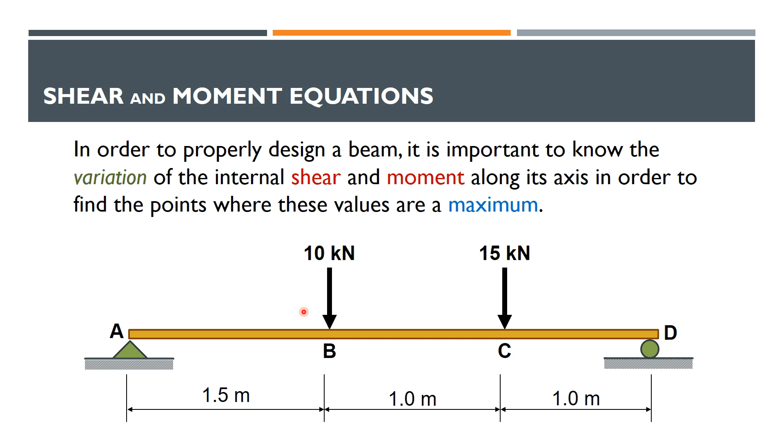And once we have determined all of those values, we will get the maximum values of shear and moment, at iyon ang ginagamit sa design ng isang beam. Although here, we will not design a beam kasi kailangan ma-analyze muna natin mabuti kung ano ba ang maximum values ng shear and moment given the external loads.

So we have here the shear equations. In shear equations, we will sum up the vertical forces to the left or to the right of a section AA. So ano yung section AA na binanggit dito? For example, ito ulit yung beam natin kanina. I just made it a little smaller.

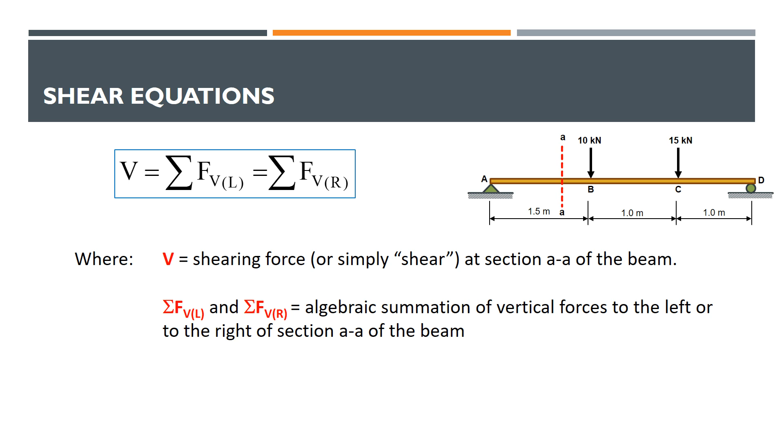So again, this summation of FV to the left or to the right is an algebraic summation of the vertical forces to the left or to the right of this section. Now, pag sinabi nating algebraic sum, we will consider the sign. So here, we will use sign conventions, like positive forces are upward, negative ay downward, etc. I will discuss that later.

For the moment equation, using the same beam kanina, with the same cutting plane here, what we will do is sum up moments to the left or to the right of the cutting plane. So again, ito yung cutting plane natin. This is the left side and this is the right side of the cutting plane.

Yung equal sign dito, the same with the shear equations kanina. Ang ibig sabihin niyan, if you sum up the moments to the left of the cutting plane, equal yan sa moment when you sum up the moments to the right side of the cutting plane.

So again, the summation of M to the left and summation of M to the right is the algebraic sum of the moments of the vertical forces to the left or to the right of section AA with respect to the neutral axis of the section of the beam. So what is the neutral axis of the beam? This is the axis that contains the centroid of the cross-section of the beam.

For example, ito yung cross-section ng beam. Ang very common cross-section ng beam ay rectangular. In a rectangular section, madali natin ma-determine ang centroid nito. Kung ito ang centroid nitong cross-section ng beam, yung axis that passes through the centroid, whether horizontal or vertical axis yan, we call it the neutral axis. Makikita natin yung magiging gamit nitong neutral axis when we compute for the stresses in beams.

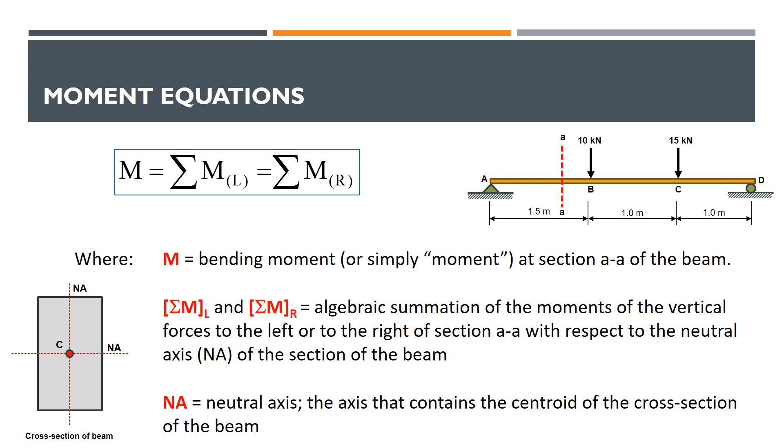Now let us have an example. Let us formulate the shear and moment equations for this simply supported beam. Ito din yung beam natin kanina, and this time, meron na itong reactions. The reason kung bakit binigyan ko kayo ng set of problems na magsosolve kayo ng reactions is because dun sa mga sample problems natin, hindi ko na ipapakita kung paano mag-solve ng reactions. So I will just explain kung bakit ganito ang mga reactions.

So again, we have concentrated loads. If you sum up moments about point D, you will be able to solve for the y component of the reaction at A. And with regards to the x component of the reaction at A, since wala naman tayo ditong external loads na horizontal, wala itong magiging value kasi wala naman itong ibabalance na horizontal forces.

Now, for RD, if we sum up moments about point A, you will be able to solve for RD. Ang naging direction ng reactions natin sa A at sa D ay both upward. So this is what we call the load diagram. This now includes the reactions.

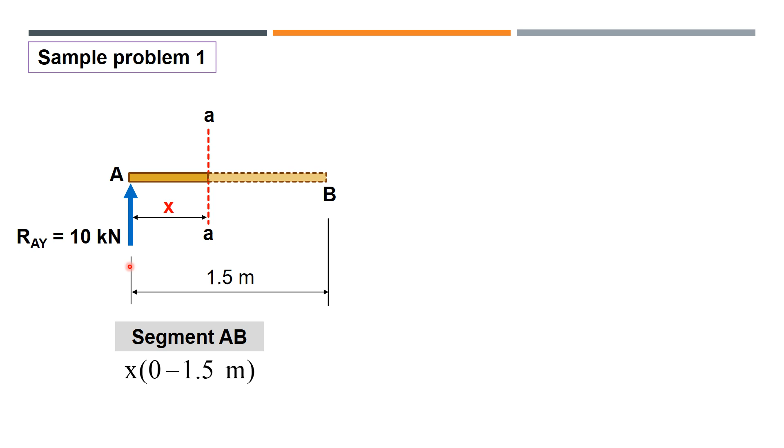Now, ano ang nakasama doon sa left side ng cutting plane? So this is your distance x. So you measure this from the extreme end ng beam sa left side. In this case, that is A. And then you measure that hanggang dito sa imaginary cutting plane. Tingnan mo ngayon, ano ang mga forces na nakasama nitong distance x. So, dahil nag-start tayo sa A, ang nakasama na load ay itong reaction na 10 kilonewtons. So when you formulate the shear equation and you sum up all the vertical forces to the left of your imaginary cutting plane, it will include the reaction which is 10 kilonewtons. So that is RAY.

Or 10 kilonewtons positive. Now here, I forgot to mention na kapag vertical force ay upward, we consider that as positive. So itong nakuha natin na equation na to, this is now the shear equation for segment AB. It doesn't matter kung may nakasamang variable na x yan or wala. Basta importante, you sum up all the vertical forces to the left of the cutting plane. Next, let us have the moment equation.

So for the moment equation, using the left side again of the cutting plane, tingnan mo ngayon, anong mga vertical forces na nasakop nitong distance x ang magkikreate ng moment dito sa section na ito. Meaning, tingnan mo yung mga vertical forces na may perpendicular distance hanggang dito. So in this case, we have RAY, and it has a perpendicular distance of x hanggang dito sa dinaanan ng cutting plane. And it will rotate in clockwise direction. So let us use a sign convention na kapag clockwise ang moment about a point, that is positive.

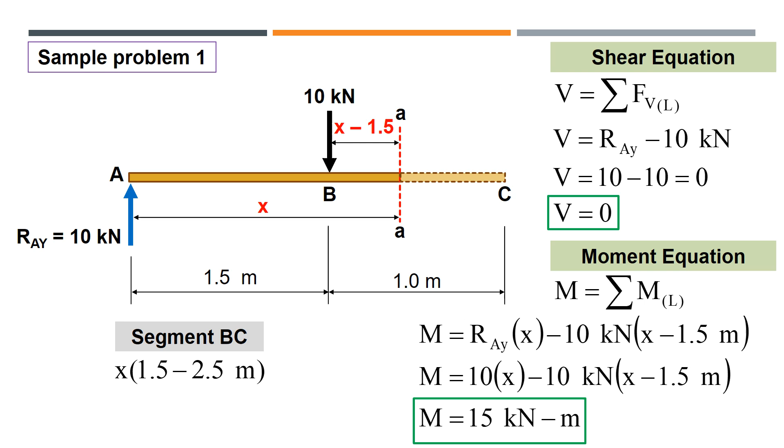Then, for the moment equation, since dito sa distance x again, itong dalawang vertical forces na yan ang nasakop ng x, so yan ang magkikreate ng moment about this point. So, you will just sum up the moments created by the two vertical forces. So, we have RAY with moment arm of x in clockwise direction, so positive. Now, 10 kilonewton force is counterclockwise, so minus 10 with moment arm of x minus 1.5. So, you substitute 10 here and you simplify the moment equation, so that this will be our moment equation for segment BC.

Now, this is again our original beam, and this time we will use segment CD. So pass an imaginary cutting plane through CD, measure the distance from the extreme left, and that is A. So ito na ngayon yung distance x. So you observe the vertical forces na nasakop nitong distance x. So we have 10 kilonewtons or RAY, 10 kilonewtons at B downward, and 15 kilonewtons at C downward also.

Now for segment CD, medyo in-adjust ko lang to na sa taas. So ang limit naman natin dito ay 2.5 to 3.5 meters. So again, for segment AB, we have 0 to 1.5, 1.5 to 2.5, and then 2.5 to 3.5. So we just added 1 meter nandito. So 3.5 meters.

So let us measure the distances from the forces hanggang dito sa imaginary cutting plane, because later on, we will sum up the moments here. So for the 10 kilonewton force, this distance is equivalent to x minus 1.5. And for the 15 kilonewton force, that will be x minus 2.5 meters.

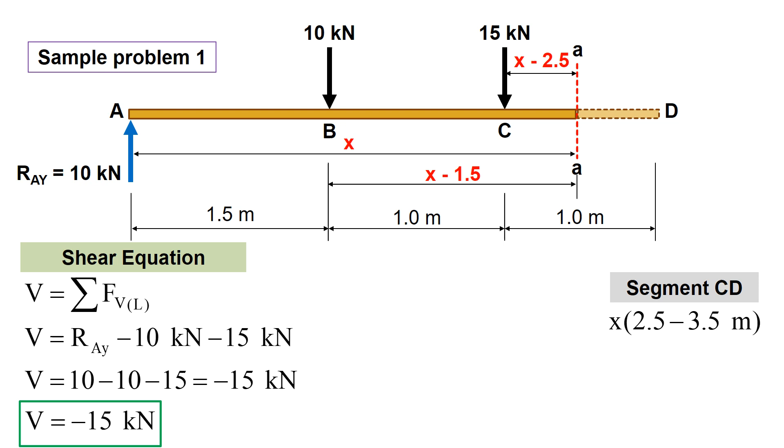Then for the moment equation, so again, itong tatlong vertical forces ay nasakop ng x. So you will sum up the moments created by the three vertical forces hanggang dito using their perpendicular distance.

So we have RAY in clockwise direction with moment arm of X. 10 is counterclockwise with moment arm of X minus 1.5. 15 counterclockwise with moment arm of X minus 2.5. So that's minus. So you substitute RAY, which is 10, and then you simplify the equation. So this is now the moment equation for segment CD.

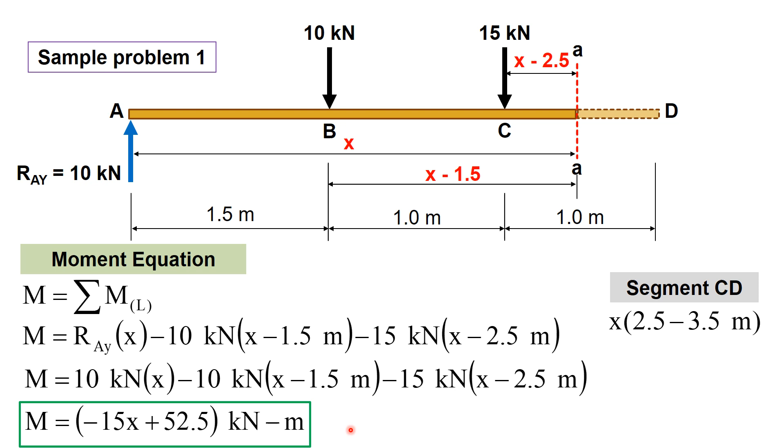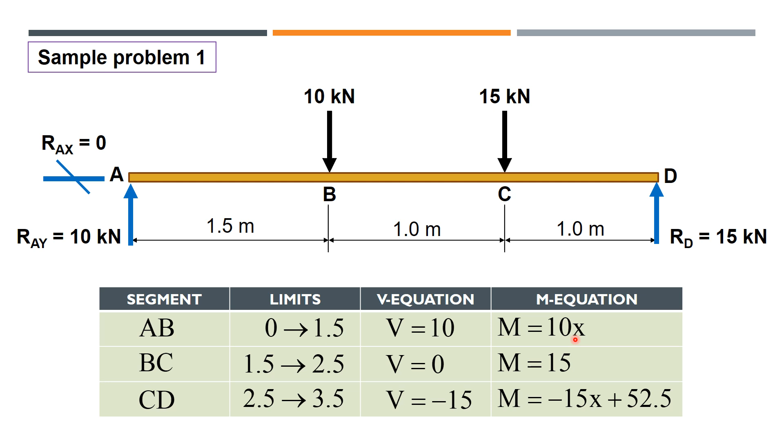For segment CD, limits 2.5 to 3.5 meters, shear equation V equals negative 15, moment equation equals negative 15x plus 52.5. By the way, do not forget the units. The units of each shear value is in kilonewtons. And for the moment, ang unit naman dito ay kilonewton meter. So we will use these shear and moment equations to draw the shear and moment diagrams by substituting different values of x using the limits for each segment.

Now, here we will show how we can formulate the shear and moment equation using the right side of the cutting plane. Kasi yung kaninang equations, lahat yon ay left side yung ginamit natin. So if we will use the right side, here I will start with CD, although you can start with AB also. So I will consider the right side of the cutting plane. There, so distance is x. If you consider the right side, you measure the distance x doon sa extreme point. In this case, this is D.

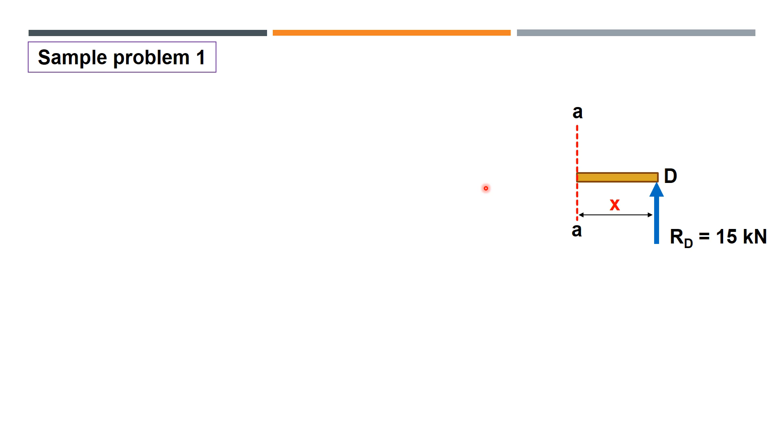So this is now the free body diagram. Hindi ko na lang sinama dito yung kabuuan ng CD. So if you sum up the shear values, titingnan natin ano yung mga vertical forces to the right of the cutting plane. In this case, we have RD, which is upward or positive. So the shear equation for CD or DC is V equals 15 kilonewtons. If you compare this with the shear equation for CD using the left side, ang shear equation ay V equals negative 15 kilonewtons. So parehas din ng makukuha natin but in opposite direction.

So for segment CD, dahil sa right side tayo nagsimula, dito ka magsimula sa D, papunta sa C. So from D to C, that will be from 0 to 1 meter. For moment equation, RD will create moment about this point of the beam with moment arm of X, and this will rotate in counterclockwise direction. So that's negative. So it will be negative RD times X, or negative 15X. This is the same equation using the left side of the cutting plane, but it is positive. So whether you use the left or the right side, we will get the same values, but they have opposite signs.

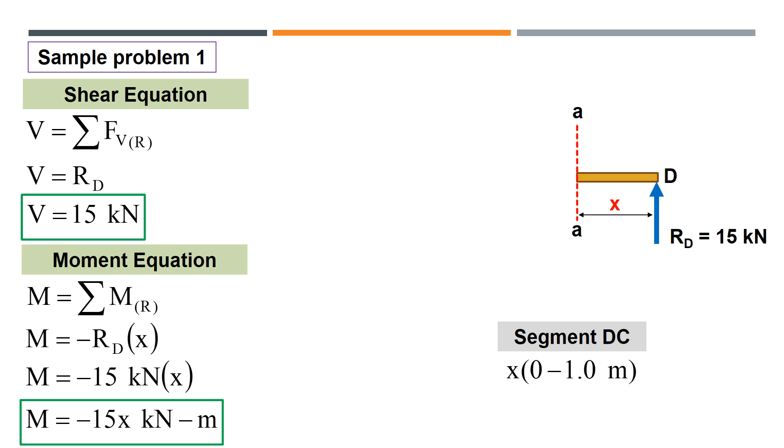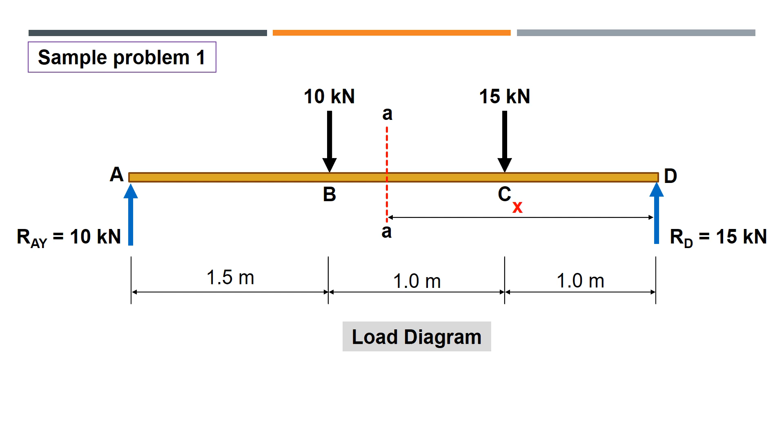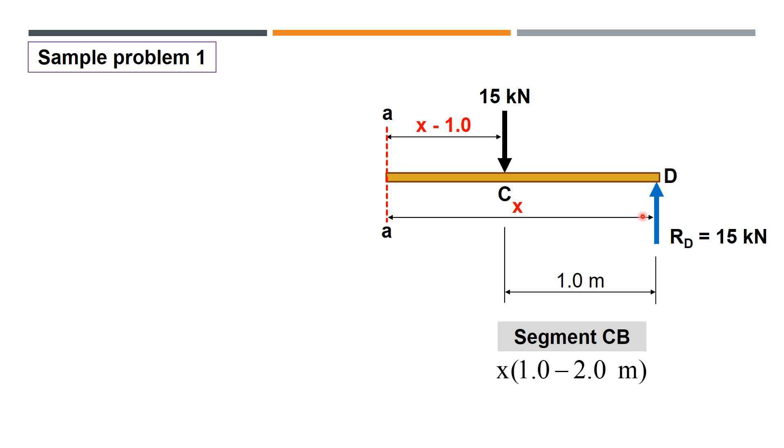Now for segment CB or BC. Again, pass an imaginary cutting plane. Measure that from D. So ang included na vertical forces ay RD and this 15 kilonewton force. By the way, ito naman ang kanyang limits, from 1 to 2. And this is the distance of the 15 kilonewton force from the cutting plane, so this is X minus 1. When you sum up the shear values to the right of the cutting plane, you have RD upward minus 15, or V equals 0. If you still recall our equation for BC using the left side of the cutting plane, we also get the same shear equation, which is V equals 0.

Then for the moment equation, summing up the moment created by these vertical forces about this point. So we have RD in counterclockwise direction with moment arm of x. Then 15 is clockwise, so positive, with moment arm of x minus 1. Substituting the value of RD and simplifying the equation, we have M equals negative 15. If you compare this with the moment equation using the left side of the cutting plane kanina, we also have 15 but positive in sign.

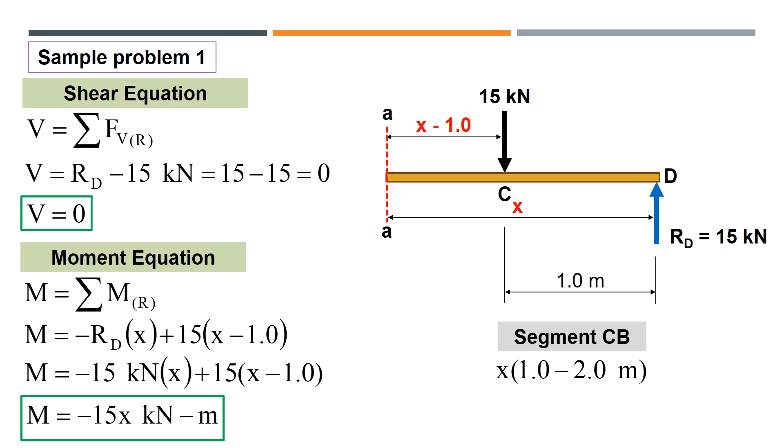For the other segment, you practice formulating the shear and moment equation. Then you compare what you will get for the shear equation, kung positive or negative or kung anong value, the same with the moment equation.